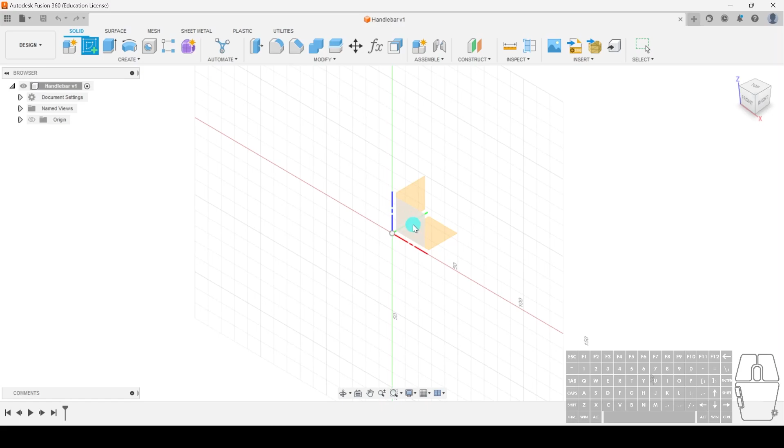Okay, so now that we have our file saved, what we'll do is use the revolve tool to basically create a cylinder again. So we'll create a new sketch and select the front facing plane. From here, we'll go to create, get a center rectangle, select the center, and make the width 30 millimeters and 125 millimeters. Hit enter, and now we have our sketch.

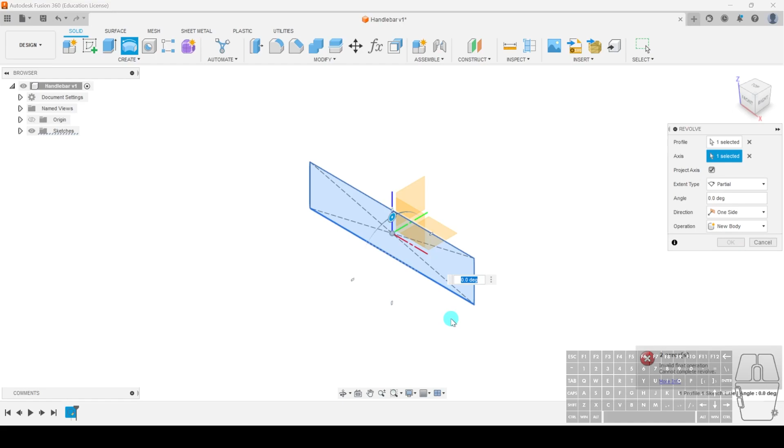What we want to do, since we are going to revolve it, is put a center line. I'll show you what happens if we don't. Let's just try to revolve this. S for our shortcut, select the revolve tool, if we try and select our middle axis... oh, I think that broke Fusion. You can see it doesn't like it. So we can't, because this is essentially telling it to revolve into itself.

So what we need to do is go back to the sketch by double clicking. L shortcut to create a line over here. We'll select the center, drag it to the other center, and leave it at this. We need to make sure this is not a construction line, because if we were to make it a construction line, then we have the same problem as before. We essentially need to split the faces, the profiles, so you can select just the one.

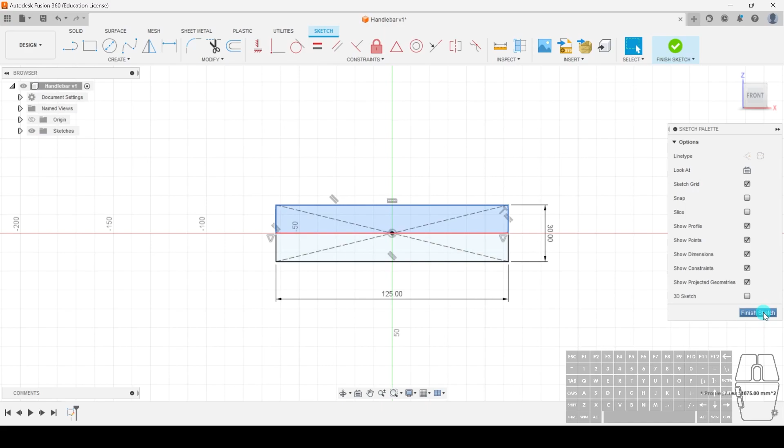So I'm going to select Finish Sketch. We'll go back to our Revolve tool. We'll select one of the profiles, doesn't matter which. For our axis, we'll select the middle line that we've created. And now we have our cylinder. Make sure it's new body, one side is fine. We hit OK, and we have our cylinder.

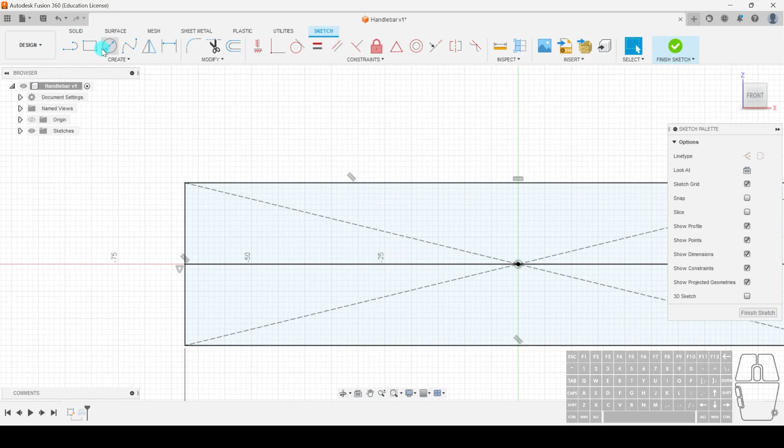Next, we're going to create the rib pattern on this handlebar. In order to do this, we're actually going to go back to our first sketch. If we zoom in using the scroll wheel, we can create some rectangles, and we're just going to place it somewhere around here for now. I'm going to make this just any number, maybe 3, just a little bit bigger. This really doesn't need to be any number, but we'll do 6.

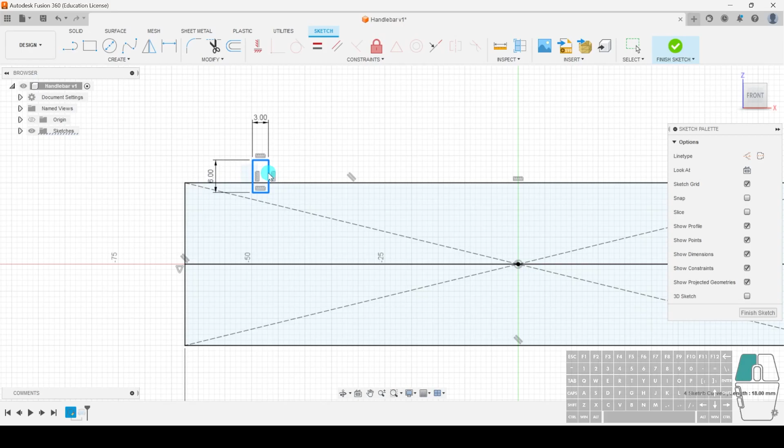So with this, we can actually position our rectangle over here. If you want to move it, you can double click along one line, and if it's connected, you'll be able to freely move by holding left click and moving. So we just want it to be, let's just say around here.

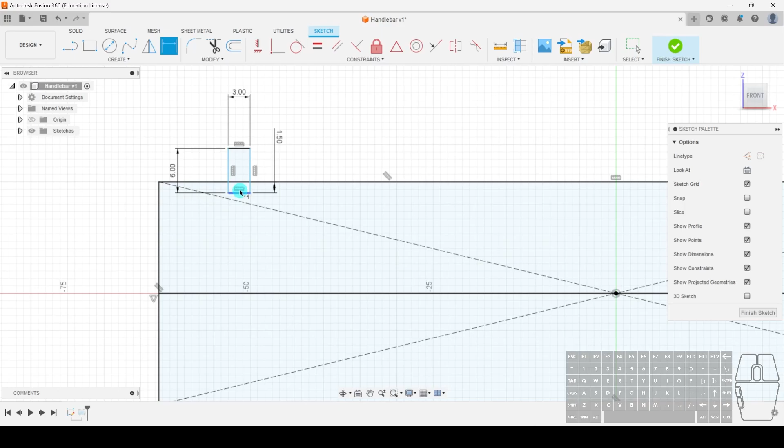If you need to have a specific dimension, which we will do for the sake of this tutorial, you select the bottom edge as well as the top edge, and now we can put our dimension. In this case, let's say we want a depth of 1.5 millimeters. Hit enter, and it should automatically dimension that for you. Move this here. So now we have one rectangle.

What we need to do now is repeat this pattern, which, if you can recall, we use which tool or which command? Rectangular pattern, yes. So we're going to go and select the rectangular pattern, which you can find in the shortcut.

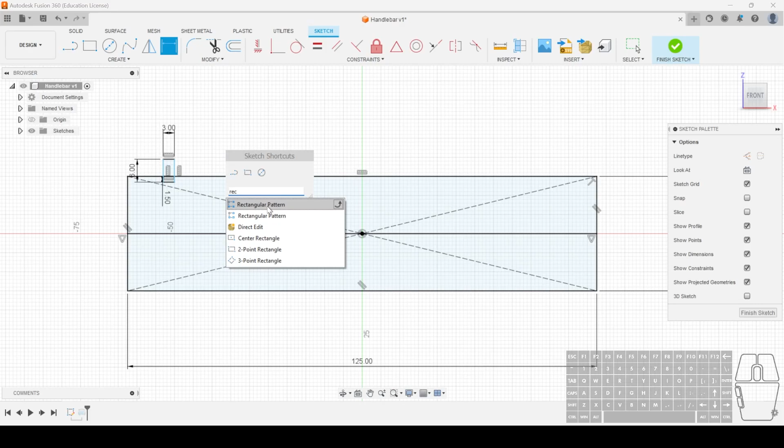Now we're going to... so this is body one, I selected the wrong one. It's fine, just go back, select the proper one. Here you can see I can select my objects, and I'm going to double click on this to select it all at once. Now what I'm going to do is drag this out.

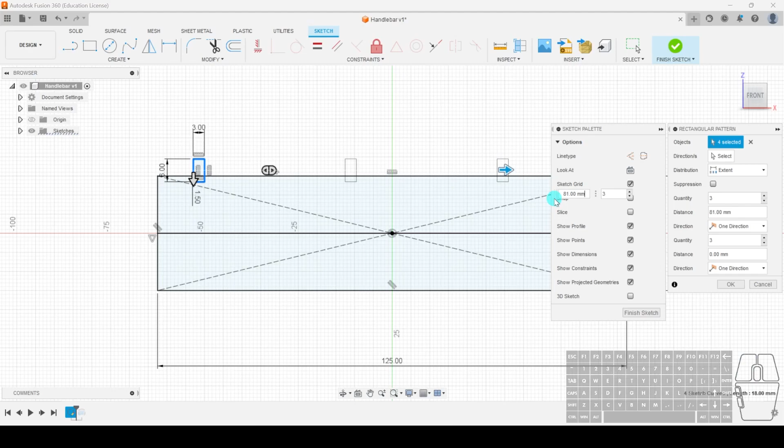I'm going to give it a distance of, let's say, what's 100? We're going to do, let's try 50. Okay, that's too many, so we can see here it's overlapping. Let's just do a few, which is 25, half of that. That looks fine, we'll do 25. And now we've got our rectangular pattern here.

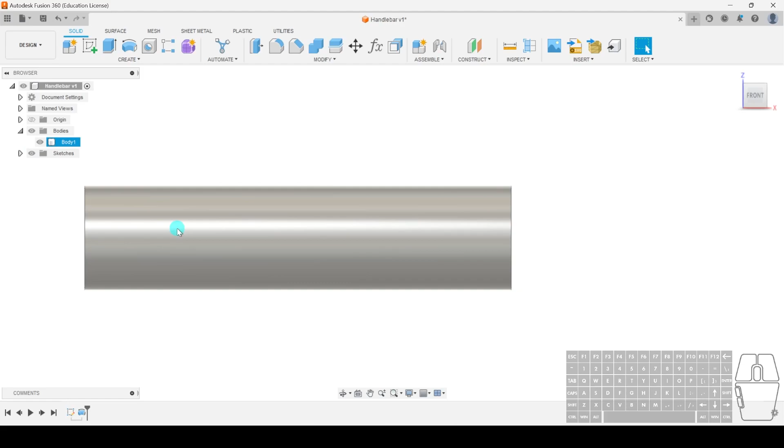What we can do is hit Finish Sketch. You can see that our sketch by default has been hidden because we used the Revolve tool, which will automatically hide it. If we want to see our sketch again, just go down to Sketches in the browser, show visible, and you can see your sketch like this.

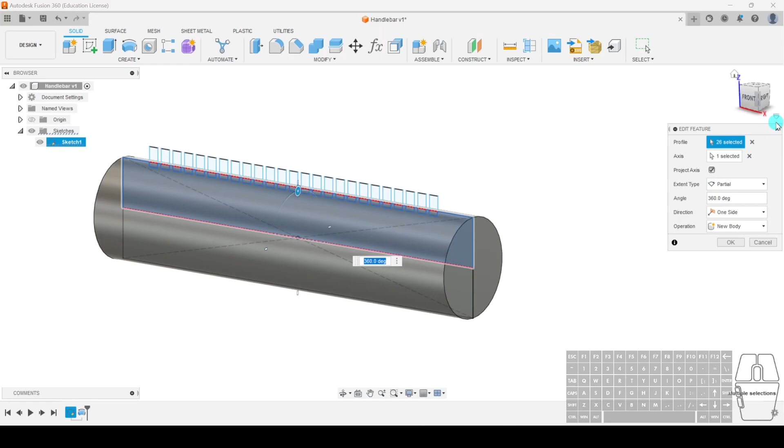So what we're going to do now is, instead of revolving this to cut it, we can actually go back to our Revolve tool, and we'll delete our profile here, select the X.

And what we're going to do is just select this profile here, and you can see that Fusion has automatically revolved it as how we want it to be. So we'll hit OK. You can hide the sketch, and now you can see our ribbed pattern in the handlebar.

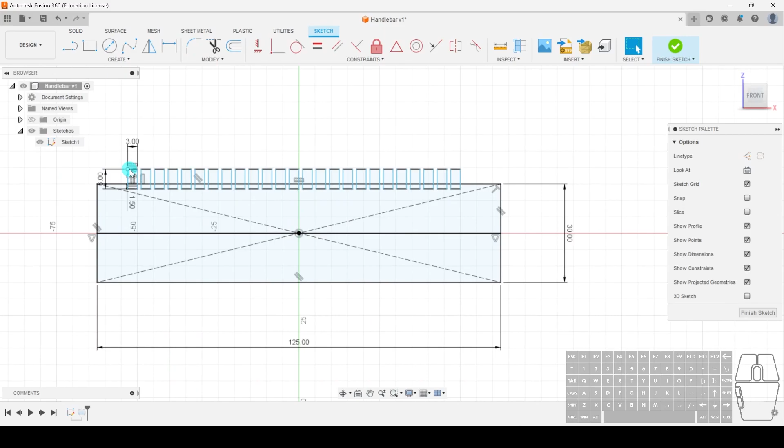Now this looks very thin, and I don't like that. So what I can do if I want to change it is go back into the sketch, and I can actually change this dimension. I'm going to delete this dimension for now just to show you, but you can move the dimension and the rest will follow since it's a rectangular pattern. So say I want it to be thicker, the gaps to be smaller, I can just put it in, finish sketch, and you can see now my gaps are a lot smaller.

So for now I'll leave it like this, no issue. So we have the main grip of our handlebar. What we need to do now is to create the wording essentially. So what we're going to do first is we need a blank area to put our word.

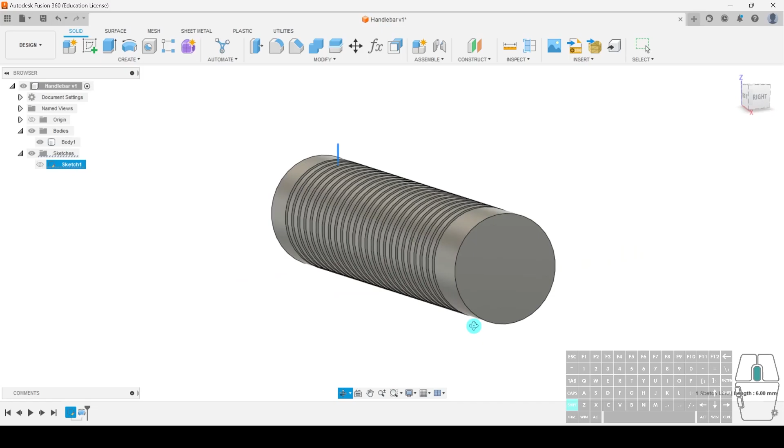We can do this very simply by selecting a face here. And the reason we do this is because this is where we start our grip essentially. So with this face selected, we're going to hit create sketch.

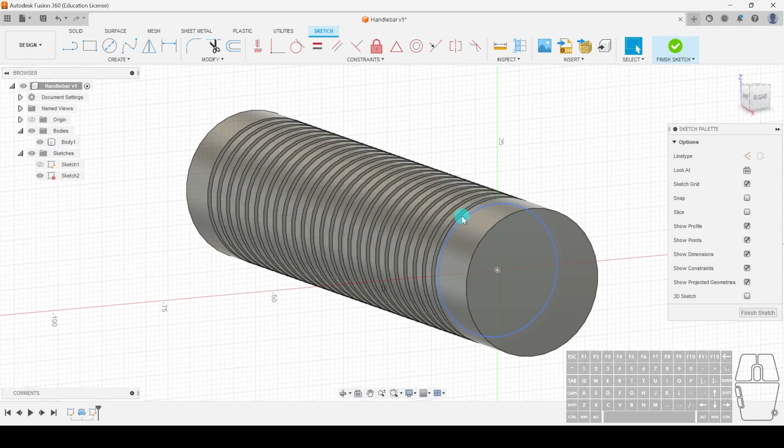Now it's going to show us the right, of course. But if you can't see this well, you can always shift middle click to drag it. And we're going to look for this line here in the middle, right? We're going to hit P to project, select that line, hit OK. And now, if we go back to the right, you can see that we have our face, the inner circle of our face selected there, or shown, projected essentially.

Now what we're going to do is we're going to create a line by using the L shortcut. And we'll just put this anywhere. Let's just put it here, and we'll drag it up to this edge. And we'll do the same for the other side, something like this. You can see there's an X there to show that we are connected.

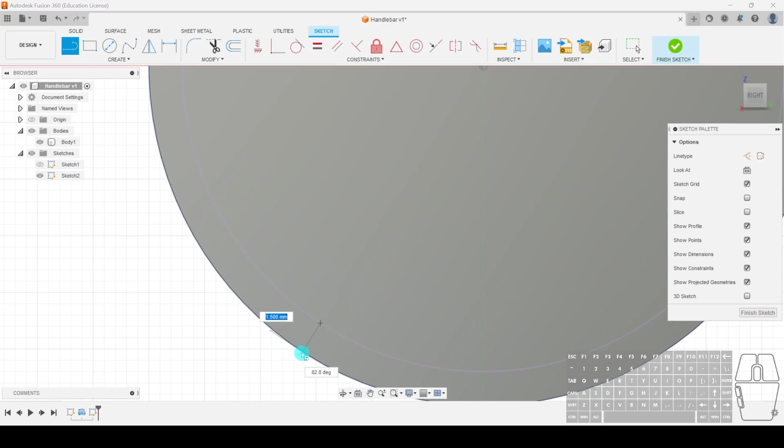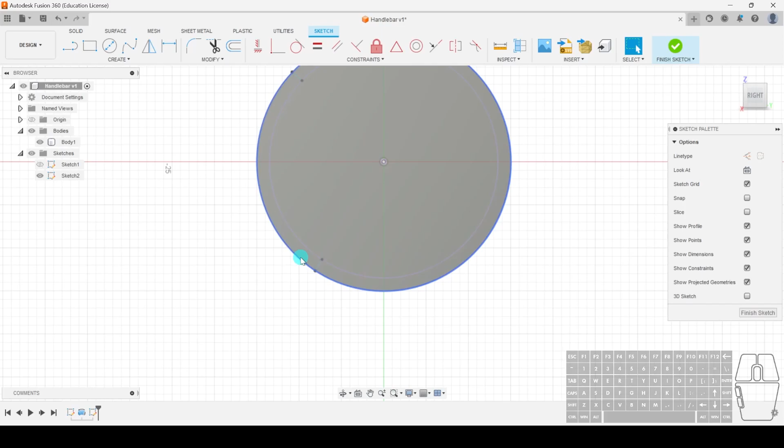If we aren't connected, let's just say I did this by accident. Hit enter. Oops. You can see that our profile is still selected because we don't have a closed profile. But if I were to click this and drag it back, one more thing I forgot to mention is you need to project this as well, the outer circle. Yeah, I'm not sure why this isn't doing that.

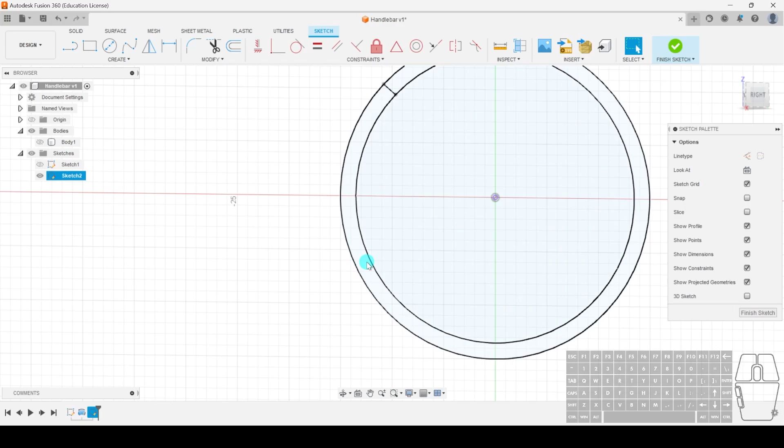Hang on. Yeah, oh okay, I know why. Because we are basically selecting this face. What we can do is we can just hide the body for a second. And we can see now that this profile is selected. Again, if I were to remove this, then we have a full profile. We need it to be closed off, like this. See? Okay, so with that done, we'll finish sketch.

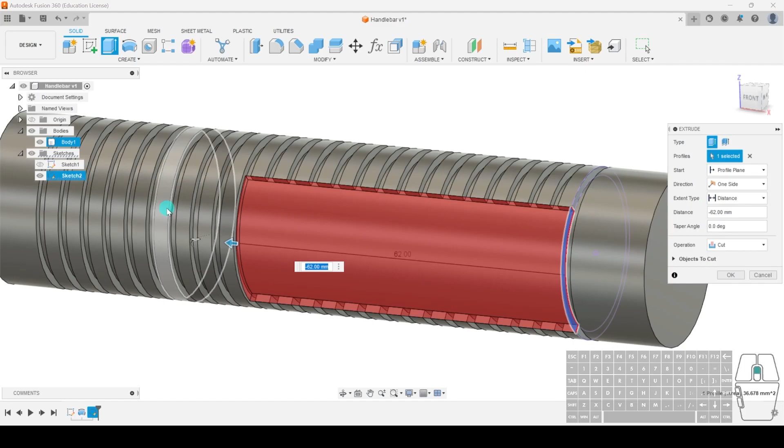We'll show our body again. And this time, we'll hit E for extrude. Select that face we just drew. And now we'll drag it down to around here. Any one of these will do, as long as there's enough space. Actually, I want a bit more space. I'll put it down to here.

So we're basically cutting off the ribs. We're going to hit OK. And now you can see that we have a flat area to put our text on.

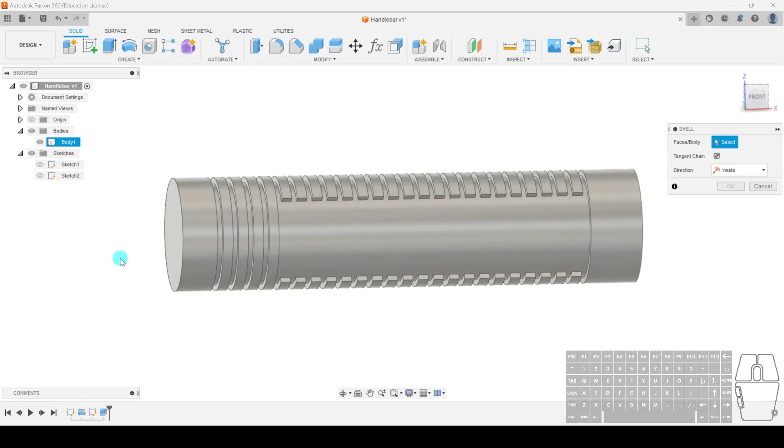So the first thing we're going to do now is to shell it so that we can see the inside. We're going to select shell. I forget where it is. Oh, it might be modify. Yeah, shell over here, or use the shortcut. I'll select one face and I'll give this a thickness of 2 millimeters. As you can see, it's essentially covered over.

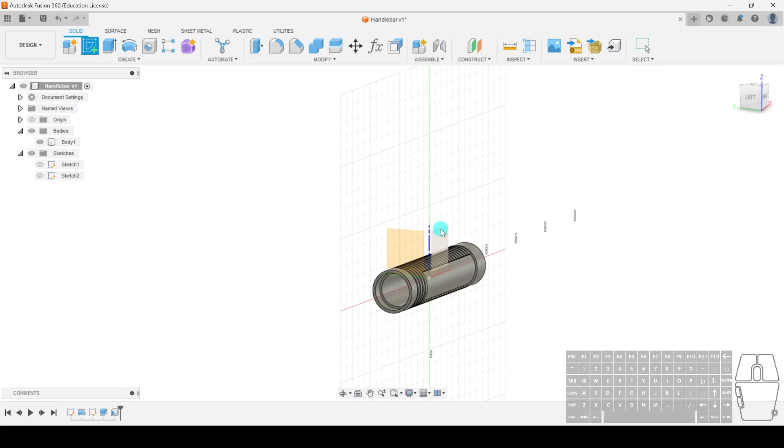We'll hit OK. And now we want to do the text. So we're going to go to create sketch and we're going to select the middle plane here. And we're going to introduce you to a new tool, which is the text sketch command. So we're going to press S for shortcut.

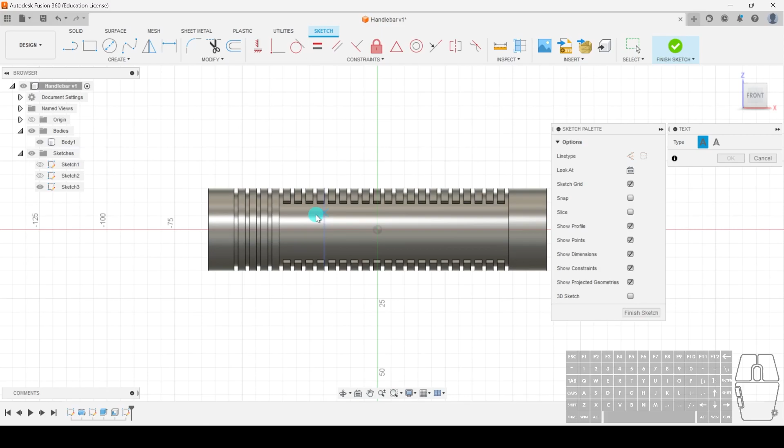We're going to type in text. You can see here is the only option. We're going to click on that. And now it's going to give us a little positioning that we can place it on. For now, we're just going to put it somewhere around here. Doesn't really matter. And we're going to click and drag it out, like so. And now by default, it's just going to show you sample text. I'll explain a little bit what each of this does later, but for now, we'll just put in anything you want.

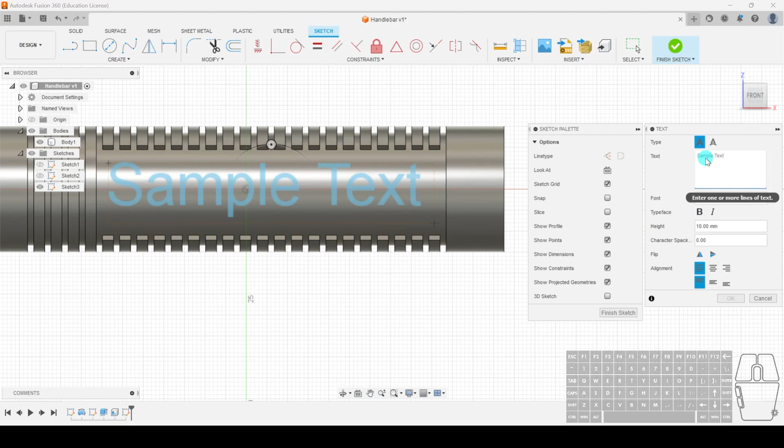You could put in your name, or whatever you want. I'm just going to put 'handlebar.' Okay, and so you can see here in the text, we can select our fonts.

There are a few fonts to play around with. For now, I'm just going to leave it at the default Arial. We can bold it, we can italicize it, many different things. For now I'm going to bold it. And you can see here that my handlebar actually extends past where I want it to be.

I need this to be a little bit smaller, so what I'm going to do is decrease the height, which is essentially your font size. For now let's try 8. That's a little bit too much. Put back to 9, and that seems perfect for me. So using this height, you can essentially change the size of your font.

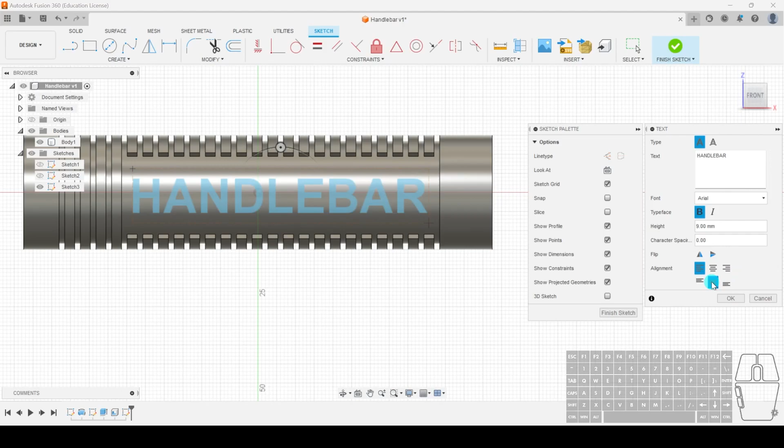This alignment looks okay, but I'm going to put this more in the middle by selecting your alignment, and I'll hit OK. And finish sketch. So now you can see I've got my text, but if you pan, you can see it's in the middle of my handlebar, which isn't really what I want, right?

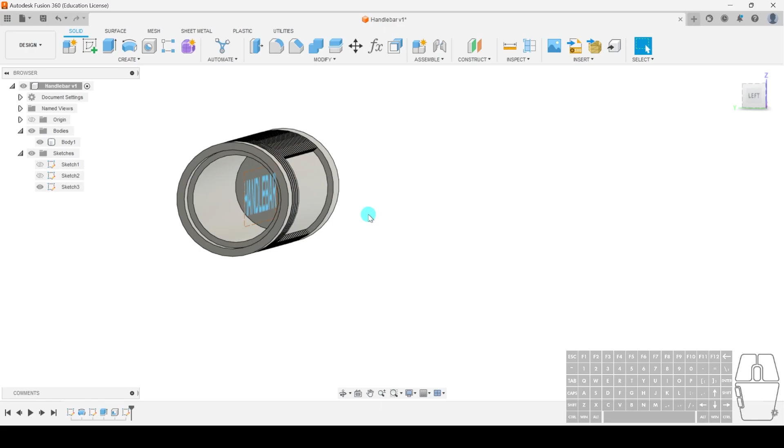So I want it to be projected onto this face, essentially. But I don't need to use any fancy sketches. What I can do, let's try first, if we try to extrude, so we press E, and we'll select the text.

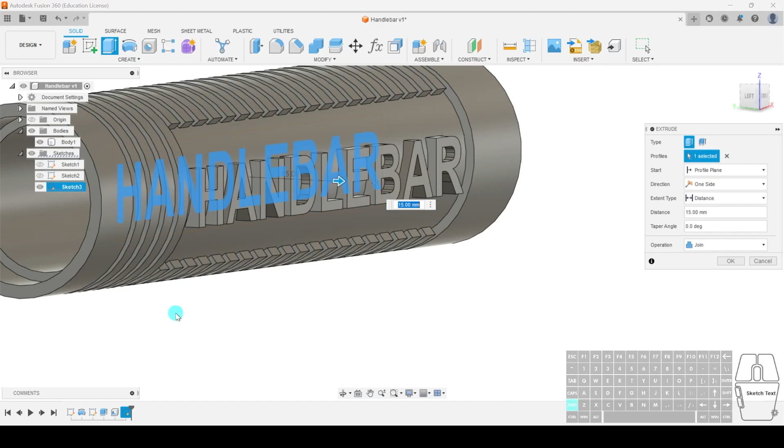You can see the profiles are selected. And if I pull it through, you can see, if I change it to join, that my text is now appearing on the top. But you can see that the body actually extends through the middle, which is not what we want. So we can't use an extrude tool.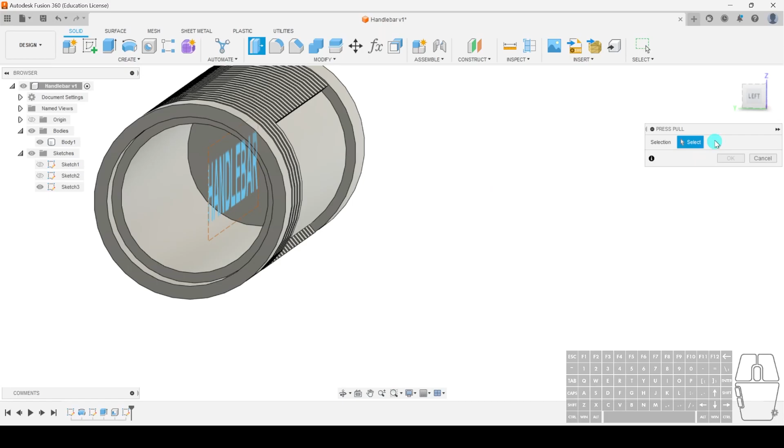So how do we get our text to extrude only from this face? There's two ways you could do this. For now I'll show you the first method, which is the press pull method. So I'm going to hit S and type in press pull, which is over here. So now it's going to prompt you to select it. You select your text.

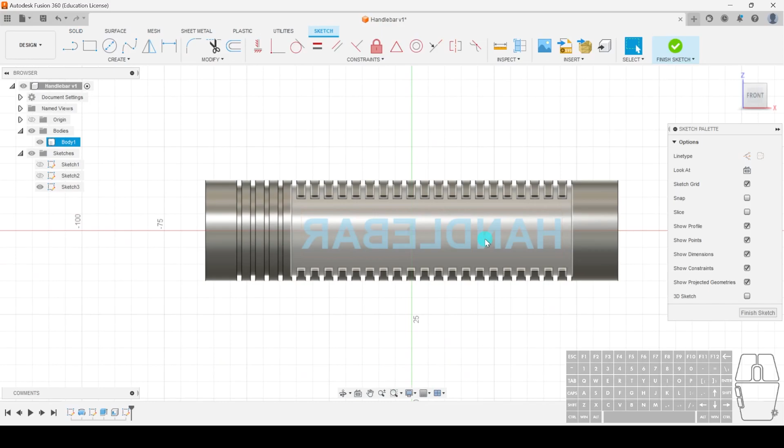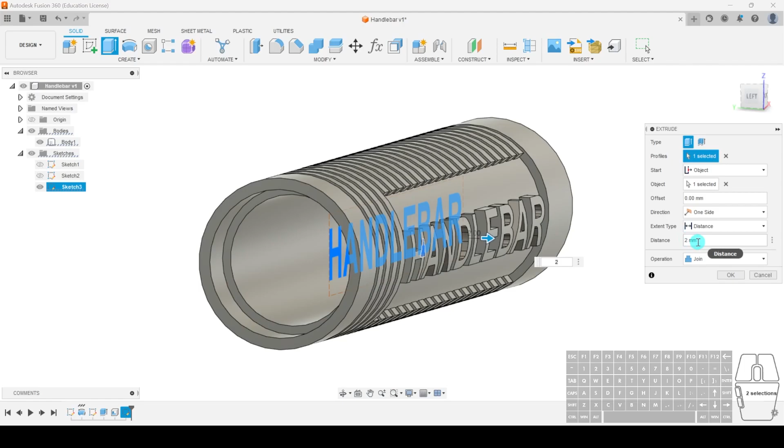Okay, so now it's worked. I'm not sure why you shouldn't have to do that, but for start, just select object, select your face, and then you can select the distance. In this case, I'll do 2mm distance, and I'll hit join, and it should work okay here.

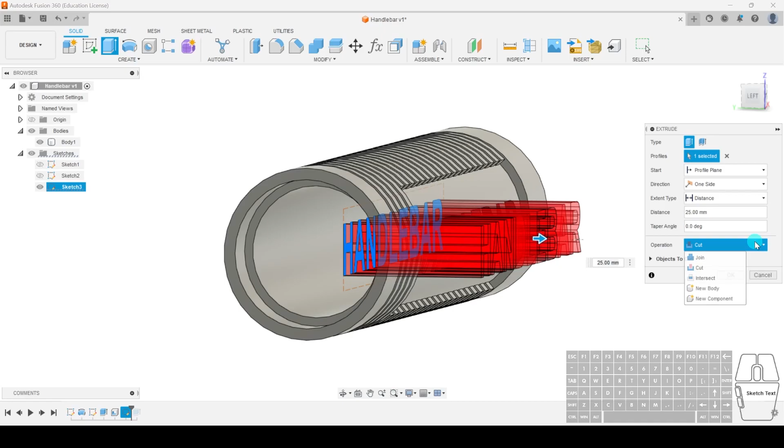Now let's just go back for a second, and let's say that like before it wasn't working, and you don't want to deal with all that because that must have taken like 5 minutes. Very simply, just extrude it out. We're going to extrude it out all the way. Going to hit cut, actually join is fine.

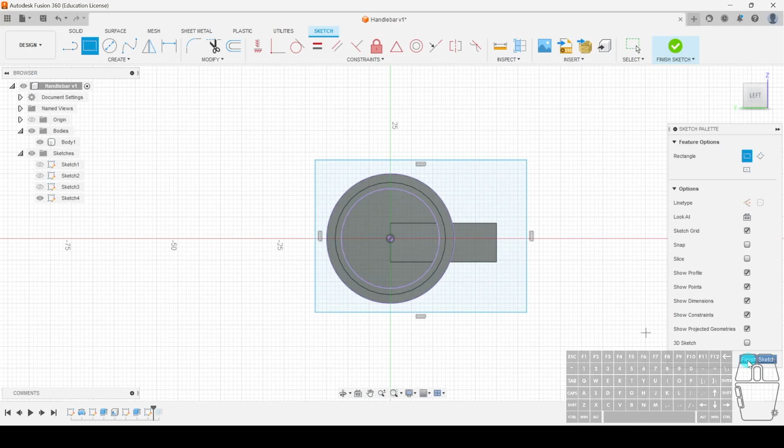Hit OK, and what we can do is hide the sketch. So we drew a sketch, draw two circles and cut, right? No, we're going to project this circle and this circle, the inner one and the outer one. Hit OK, and as you can see, we don't have a profile, so a very hacky way is to just put a rectangle over it. Hit finish sketch, and now you can see I have a profile plane here.

What I can do is hit both of these with shift click, extrude, and then just cut it out, like so. I'll just cut it out to there. And if I hit OK, you can see that I basically got the same effect.

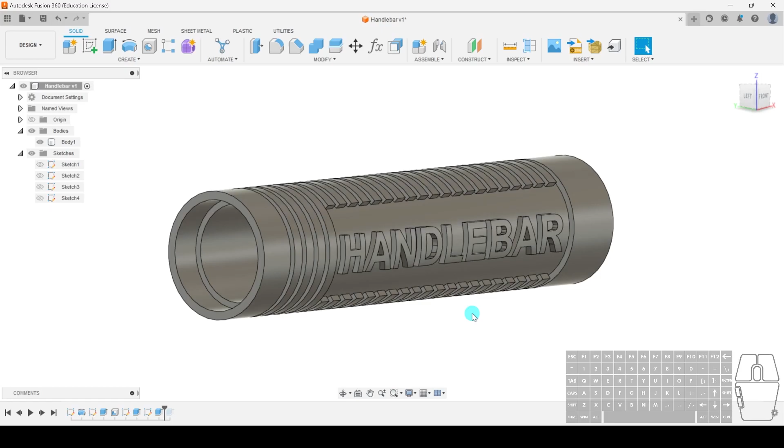So really, sometimes Fusion's tools kind of bug out. I honestly have no idea why. But as long as you understand how you can get the desired effect, there are ways to essentially overcome these issues. So I'll undo this since it worked for me. If it didn't, then just do that.

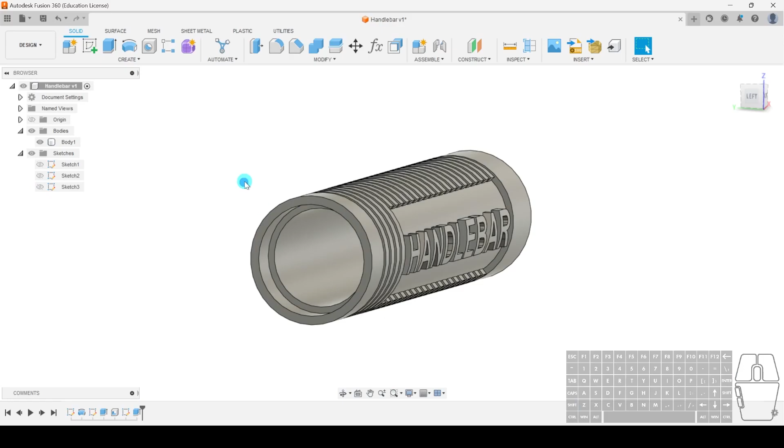Okay, so we're here, so now we have our text. I'm going to hide the sketch. And you can see I want it to be a little bit closer to the text itself. There's a huge gap here.

So again, what I can do is simply go back to my sketch initially, and what I'll do instead is move my line here a little bit closer. Let's try there. And it's a little bit closer. Let's make it even closer. Somewhere like that. I might have gone a bit too far, but we'll try.

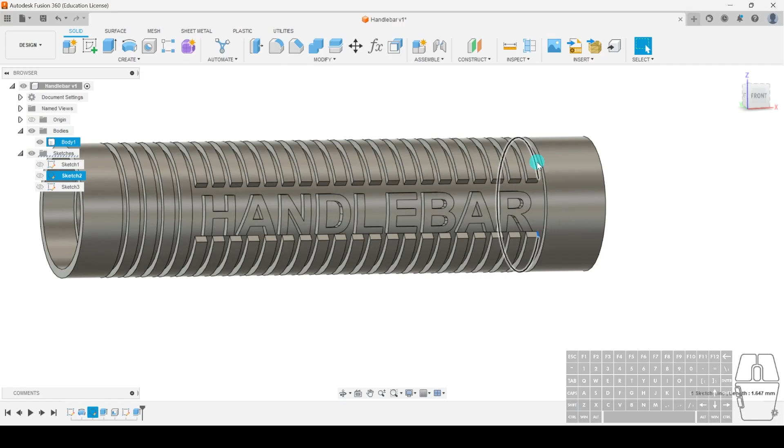Yeah, so let's just say this is fine for me. So we can adjust the sketch, and everything is in the timeline accordingly, so it'll work. And now we have our handlebar with the grip and the name embossed.

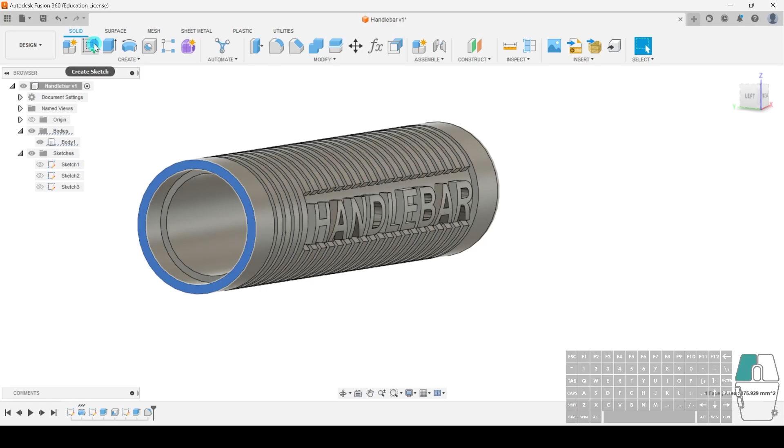So while we round off the edge, we'll press F for fillet, select this, and we'll just give it a round edge. Hit OK, that looks okay. And we'll give it a last little flare at the top.

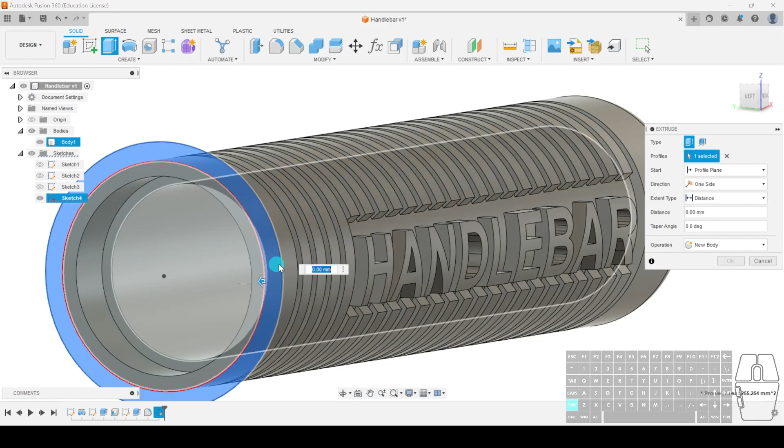We'll hit circle, which is C. Create, let's just do 35. We're making like a lip. Yep, we're making a lip. Now we can select just the outer one since we are basing this profile off the face, and we'll just extrude it out a little bit.

Here, actually, you know what? I want it in line with this. So I'll select that face. And now I have the example. I'm going to select new body. Hit OK.

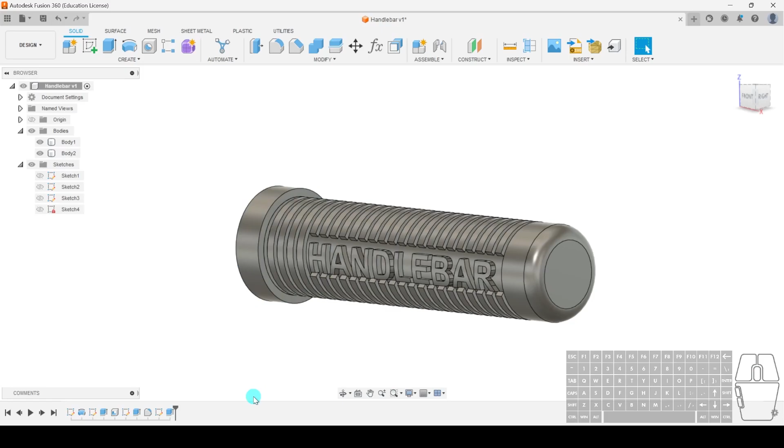And here we have our handlebar. If I want to increase this, make this a bit larger, I can always go back to the sketch, increase my dimension by double clicking, and let's just say we want it to be really big, 50. And here we have a much larger one. For now, I'll press Ctrl Z to go back and select this.

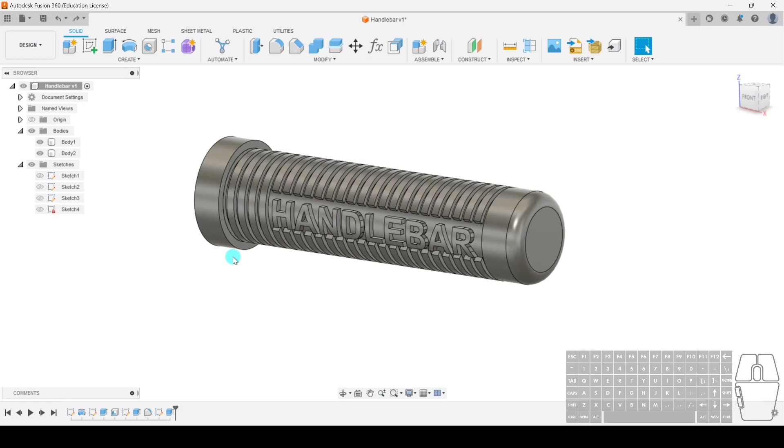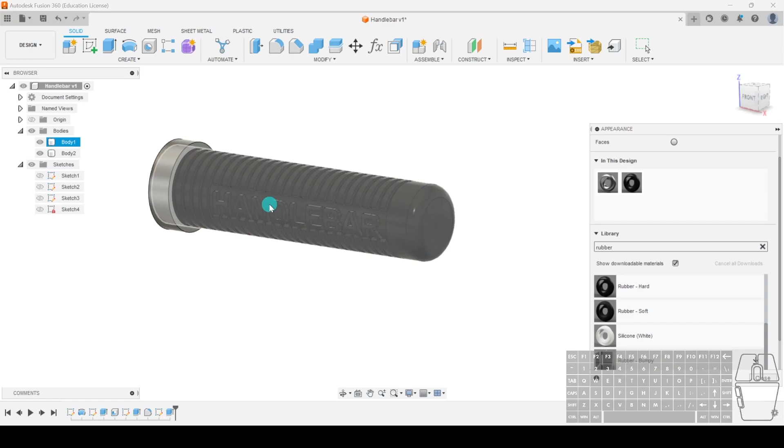So the reason why I made this a new body is because I want to go into appearances, which is the shortcut A. I'm gonna go down here and I can search, because I know what I want. I'll type in rubber. And you can see here in my library that they give me a few options. There's rubber hard, soft. I'll select hard, drag it over my handlebar grip. And now you have our body not selected because we are changing the appearance by the body.

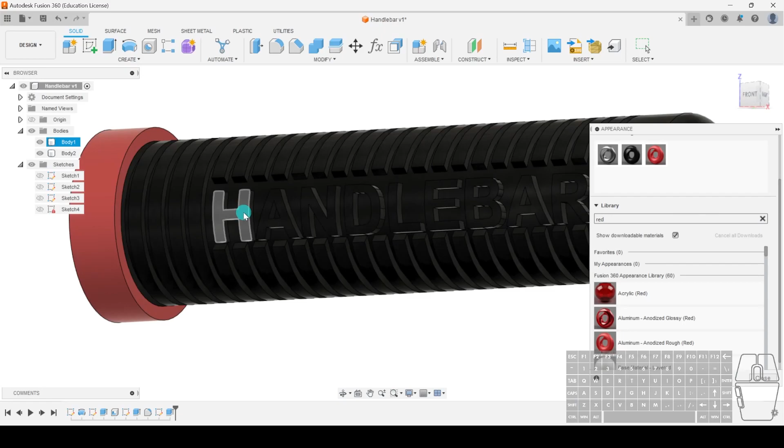In this case, let's make this a different color. We'll select red. I like aluminum, anodized rough, click and drag, and I have it here. Now, if I want my text also to have this red, what I can do is I can select faces. From the last tutorial, we've gone through this. Select the front faces here. You can see this is quite tedious, which is why, oops. Yep.

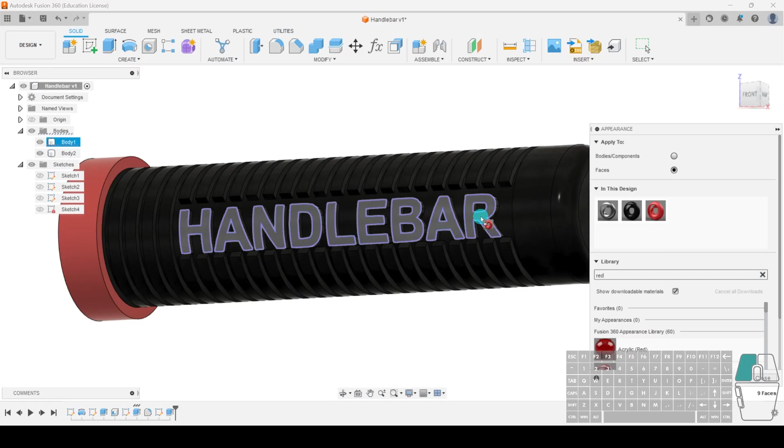Select it, drag it over our face. Okay. Give it a second to load. And now we have our handlebar. You can see this has the texture and the appearance that we want it to have.

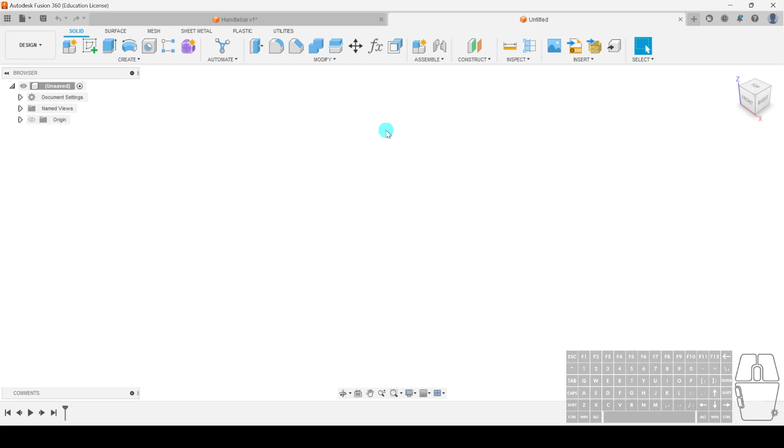So I'm going to create a new one. You don't have to follow along, but actually you can if you want, because I'm going to show you the emboss feature, but I'm going to make this a 50mm cylinder. I'll extrude this out, doesn't matter how much. Okay. So if I want to shell this now, let's go to shell.

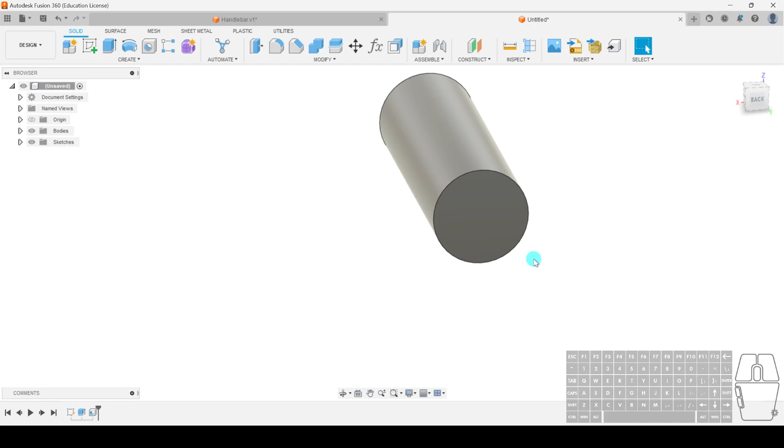Oops. So let's select shell, and we select that face, right? We'll make it again a 3mm thickness. Hit OK. You can see that on the face we selected it shelled that, but it's not made it hollow essentially. So it should, if we do it instead like this. Hang on. 3. Okay. Now it gives us a hollow tube.

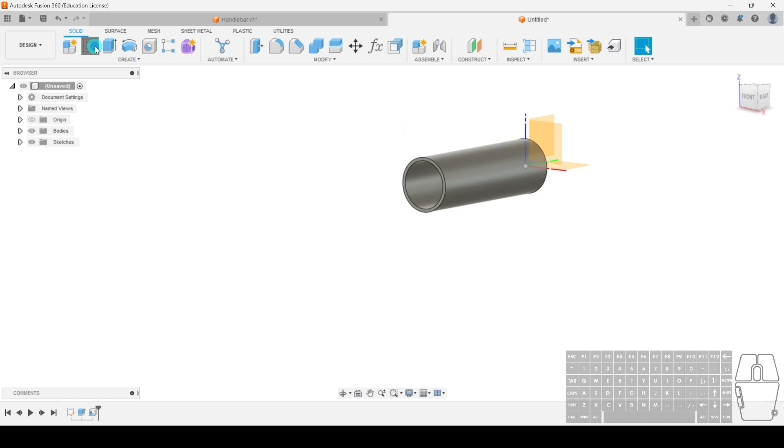So you have to think of shell like the face from which you carve out every single thing. So imagine a bowl, right? In fact, let's create a very simple bowl here. So we're gonna have a circle, right? And I'm just going to extrude this and give it a taper of 15 degrees. Actually, maybe more, 25. Okay, so this is a very rudimentary bowl, but sort of explains it.

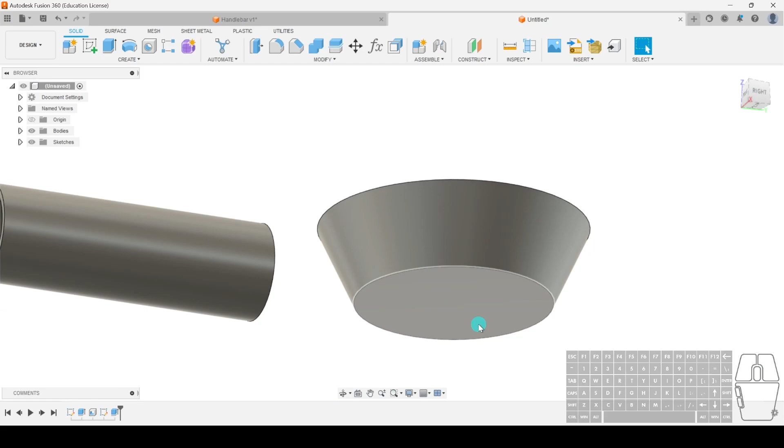If you think about it, how would you make this bowl in real life? You have a solid block of a cone right now. If you wanted to make a bowl, you need to scoop out material from this side of the face. So essentially your shell command here, if we select just this face, is going to scoop out material from there. Let's just give it a 5. And you can see you're scooping out only that face. And once you hit the bottom, you're going to leave it alone because that's the side. You're not scooping that side, are you?

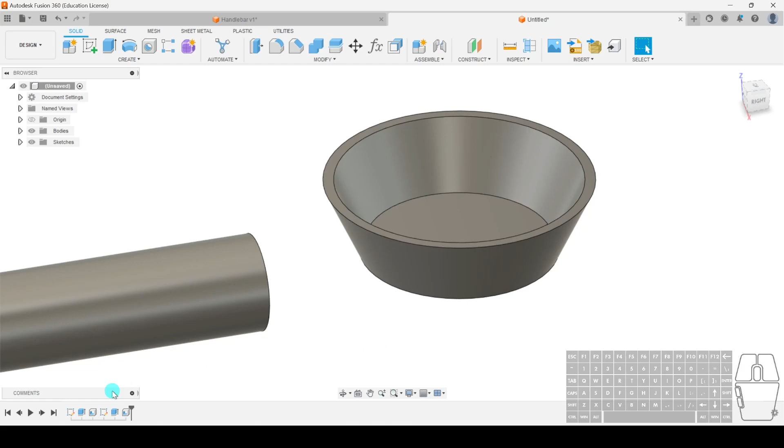However, if you go back to this side here, and by the way, if you see I can't select this face, that's usually because if you give it a value, it won't let you select the faces. If I press 0, now I can select the face. So just a little tip, by the way.

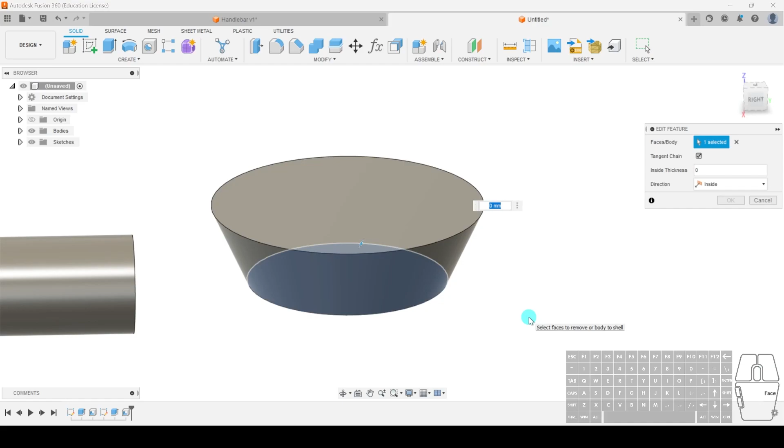But if I select this face, so now let's say I select that face and I hide this face. So now I've essentially reversed the process. So we do it this way, 5. Now we've made something like a dog bowl, right?

And so if you think about that logic, if we can carve out from this face and the other side gives us similar results, we just have to select both faces and it will give us a hollow object because you're carving away until you're leaving only the walls. So when you use the shell, you have to think of it like you have a spoon and you're literally carving everything until the very edge of the faces that weren't selected.

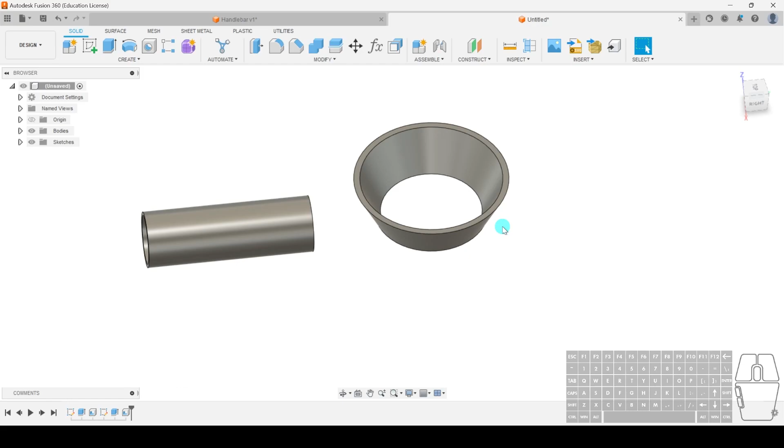It might take a little time to get your head around it, but as you practice along, you sort of understand. Of course, if you don't want to bother, you can always create a sketch of a circle, extrude it out, and that will also give you a hole.

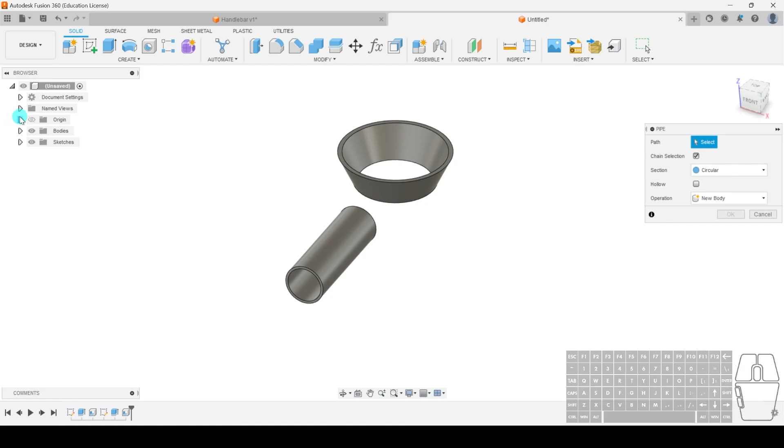In fact, just as a little tip, you'll do this in future ones, but you can actually create a pipe here. So this is a 3D body. We can essentially create a pipe. Oh yeah, it needs a path. So in this case, I will need to create a sketch. That's fine. So again, we do a pipe. And you can see we have a pipe. We can hollow it, and now we have a pipe. We'll go through this in future, but for now, you can use the basic tools, it's fine.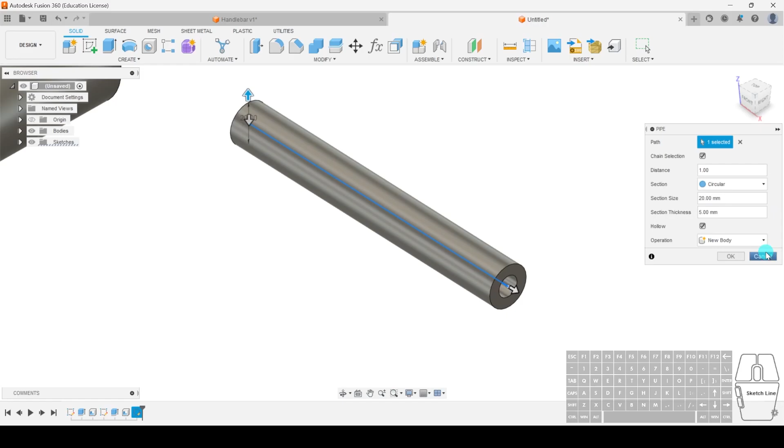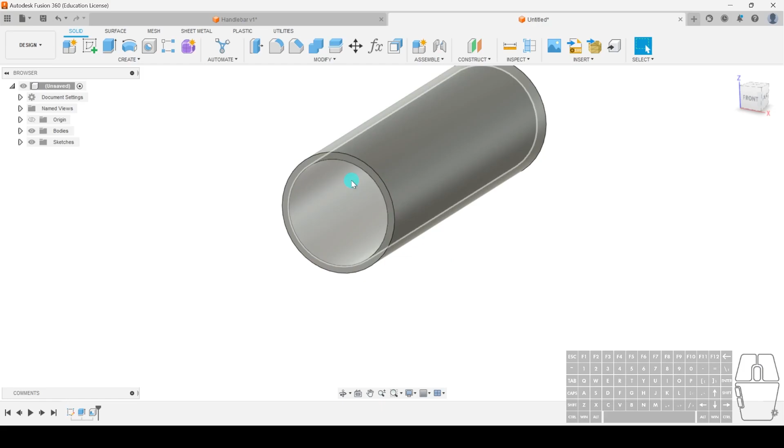Okay, so let's look at the emboss, and what I can do is I can go back here, delete all features, and it'll give me back to where I was at the start. Again, we are going to shell just this one side, give it 3, okay. And now again, we're going to do the text in the center. And actually, I forgot to do it just now, but let's show you a bit about the text.

So there is text by default, which is a bounding box. So you'll write your text within a box, or there's text on path. Text on path basically selects a path. So let's just say on this outer edge here, if I click this line, then it's going to follow that line, right? See, so if I were to type Fusion, hang on.

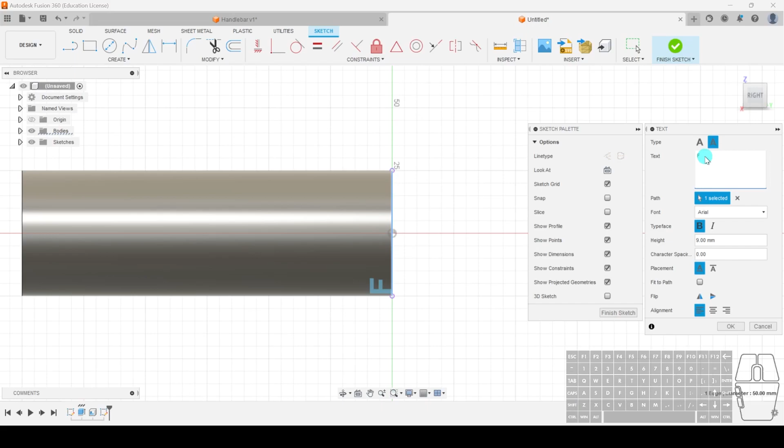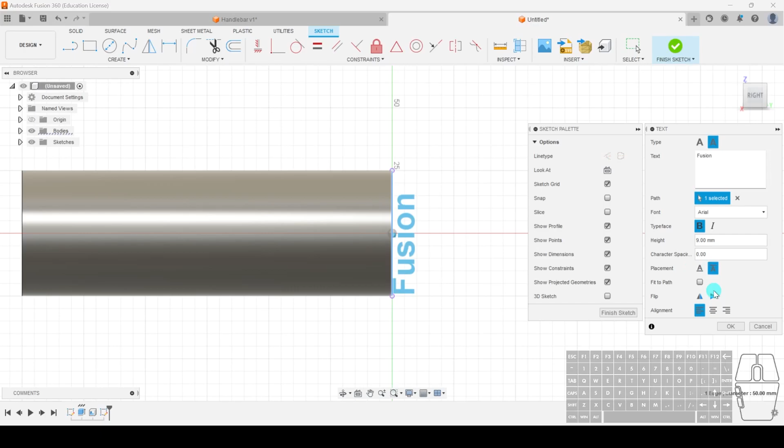Okay, so text. If I select text on path, again, I select this, type Fusion, so it will follow that path essentially. So it basically wraps around this line, right? I can always flip it. So let me just type Fusion again. If I want it to be on the outside this time, I can always flip it here. Placement below the path. You see? Again, I can center align, whatever I want.

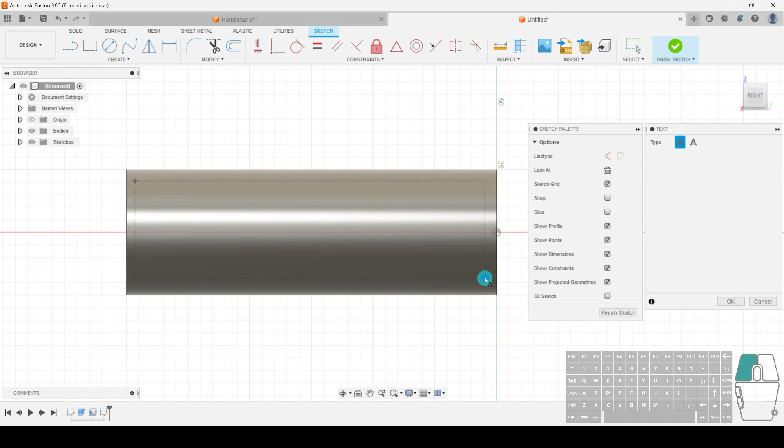There's also fit to path. This just means it spaces out along the entire distance. Usually you won't do that though. But that's just another thing you can do with Fusion's text command. For now, I'll select bounding box, and actually, right now I did this, which is just there, but you can actually dimension this. I'll leave it like this for now.

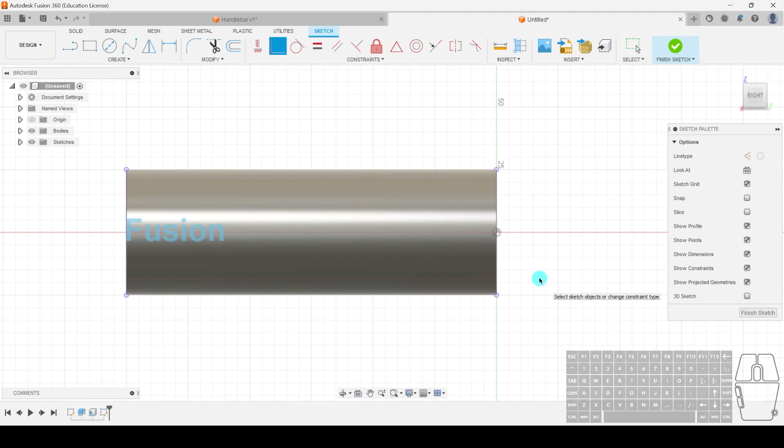Because again, it's a sketch, right? So I'm going to go to coincident, hit this edge, select that. You can see now I've essentially constrained this line to this edge, you see? And so now if I were to try and make this center, which I'm going to double click again to access the settings, if I hit center, now it's perfectly centered in my cylinder, right? So again, I'll just leave it as is. I'll make this a little bit bigger, maybe 12, that's fine.

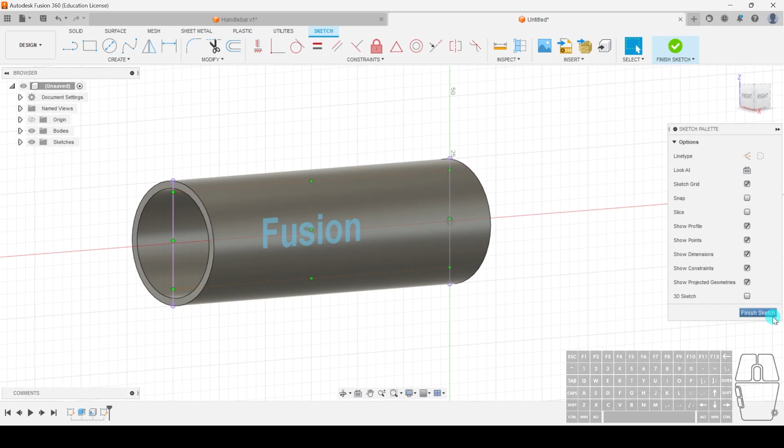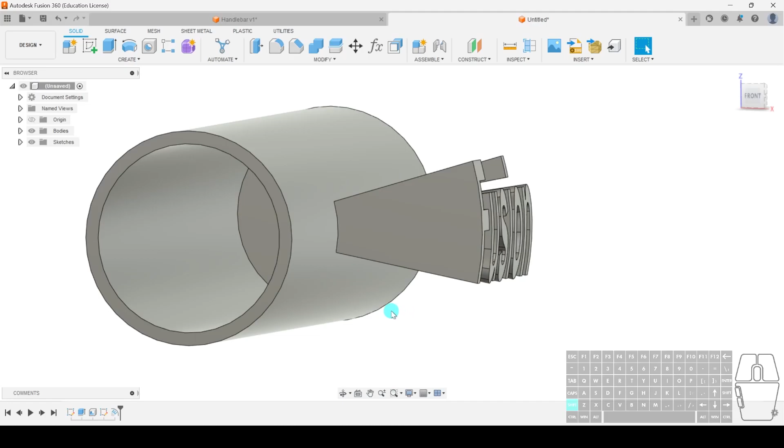Enter, finish sketch. And let's try the emboss tool. Hopefully it works this time. Select my outer face. There we go. Okay. So the difference between the emboss and the press pull or extrude is that, and I'm going to do this to exaggerate, but you can see how this is creating sort of a blow up feature, you see? It comes out almost at an angle, essentially. And that's because it is following the curvature of this cylinder.

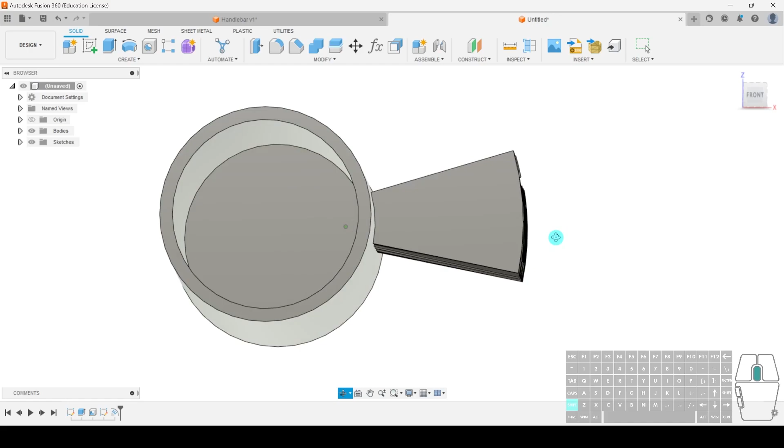If I look at it from this direction, you can see that this circle is essentially an offset, right? And so Fusion is going to connect those in a sort of angled way. If you compare it to the extrude or press pull, let's go back here. Select this. We are going to go in the other direction.

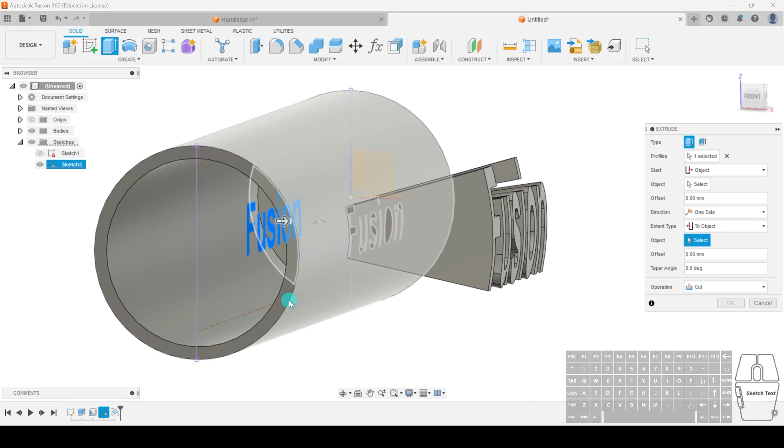Again, it's being very finicky. Whatever. We're going to ignore that. Just hit join. It doesn't matter. But you can see the difference, right? So this will be straight, whereas emboss will come out at an angle.

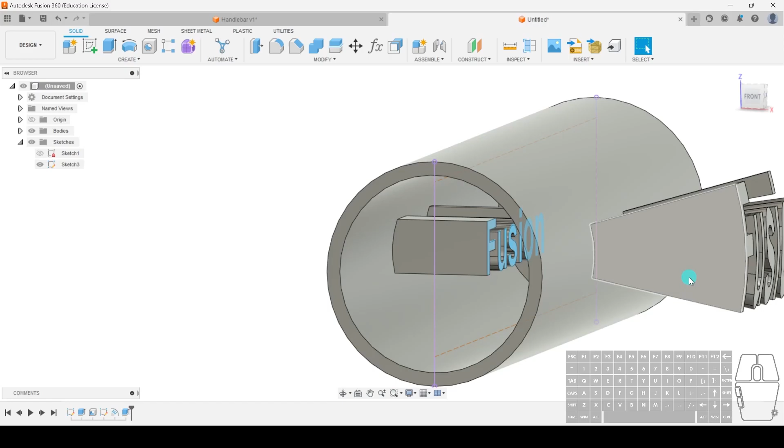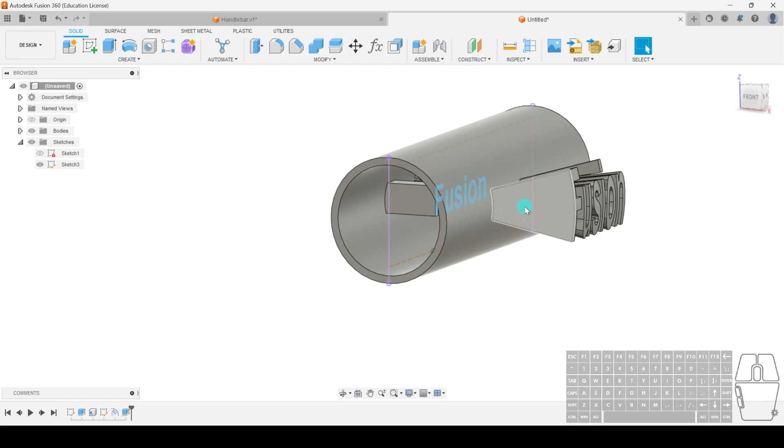So it depends what your applications are. If you're trying to 3D print something like this, it might be useful to have the angles, but sometimes you might want it to be straight for whatever reason. So it's really based on your preferences in this case. So as long as you understand the difference between the emboss tool and the press pull, they do very similar things. But the main difference is that the press pull will be straight, and the emboss will be at an angle by default. So just keep that in note.